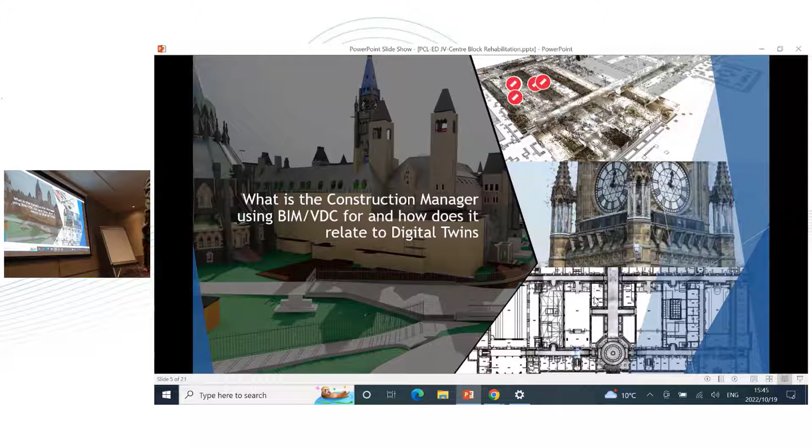So we've been at the project for about... Pat, how long? 2018. So the project initially started in 2018. We got the keys to the building in October of 2019. It was a super big deal. And really we started our demo and abatement series of projects probably in January of 2020.

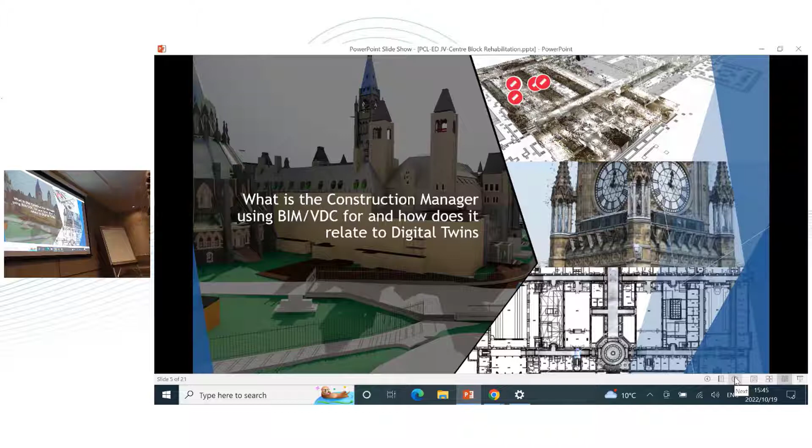So it's progressing. There's a lot to do. I often do take visitors, I bring them on site for the first time and they look at me and they're like, 'What? How come this is going to take so long?' I say, 'Well, let's take a walk.' And we do a quick walk. Well, you can't quickly walk through the building, but you take a walk through and you understand the scope that's involved in it. So.

Sorry if there were any troubles getting started. No worries, you can just use the mouse to switch between the slides. Absolutely. Can I go back though?

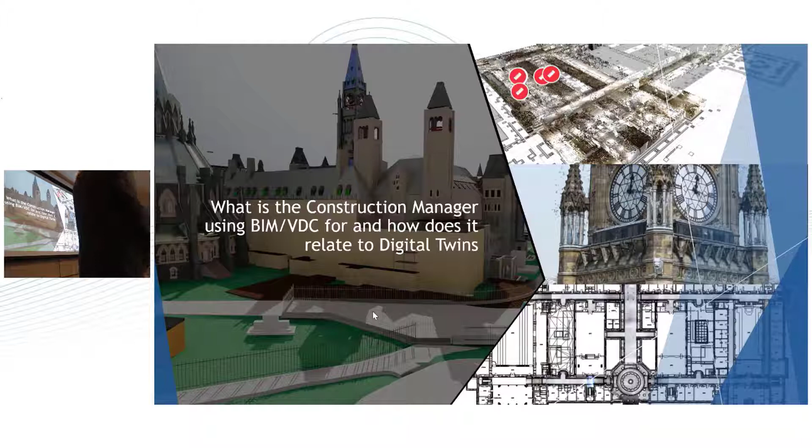We use it for analysis as well. So oftentimes we have some super smart project managers and superintendents on the job, and they'll come up with an idea and we build it virtually so that we can take a look at it, find any problems, and solve them before we actually execute in the field.

So one of the key components to the whole project is heritage, and tracking that heritage, documenting that heritage, all that's critical to what we're doing there. So on this side here, you see this is a drone capture of the Peace Tower. Very nicely done. We have a drone that flies bi-weekly and on request. So if something special comes up, the drone goes up and takes a flight and snaps some photos.

And this is a mesh that we've created from that drone imagery. So we oftentimes combine the two, the mesh and the point cloud data, so that we can analyze and do test fits around stuff.

So as I said, heritage documentation and site protection. Heritage is key. Heritage is probably the most important factor on this job, just because there is so much heritage within the building that needs to be either removed or protected in place while we do construction.

As you can imagine, there's a unicorn statue in the Senate side of things, and it has this little unicorn horn sticking out of it. So we have to deconstruct the Senate while making sure that we don't knock the horn off the unicorn. So it's doing things like documenting that and protecting it in place.

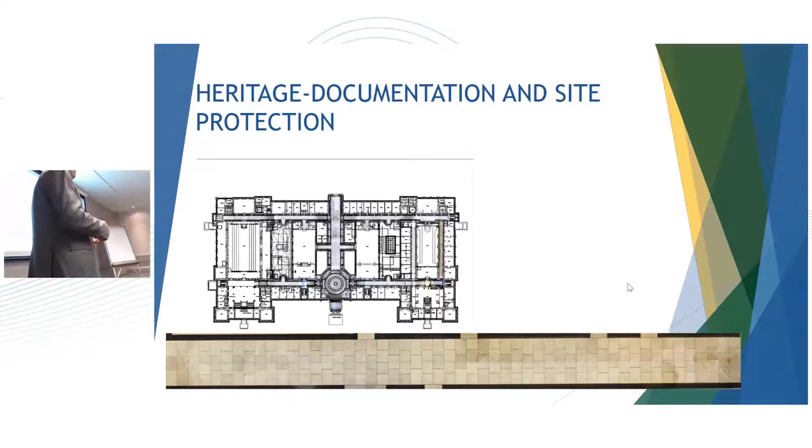So I can oftentimes say, can you send me the raw data for this floor so I can send it to the conservators so that they have a more holistic view of that floor? It's also all geo-referenced, so when it comes to putting it back in place, we can pin those points and get the exact location. Each of these marble floor tiles also gets a unique asset identifier as well as a barcode, then it goes in the box and gets shipped out. We have a management system that tracks each piece of heritage that goes out of the building, so we know exactly where it is at any given point in time.

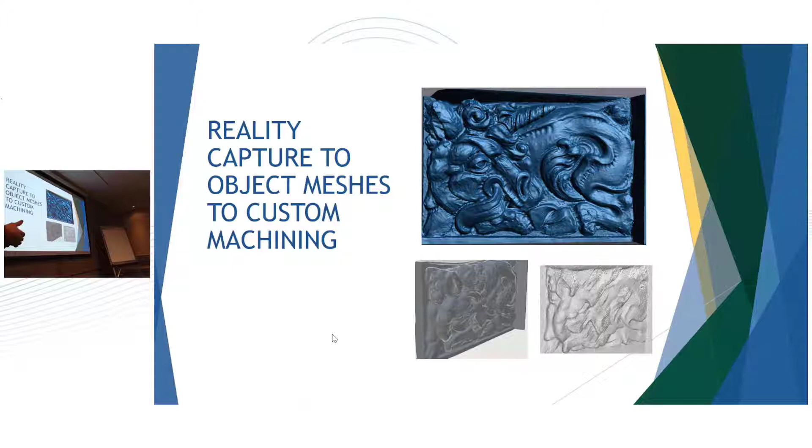And then what we'll do is we'll invert the geometries so that we can create custom protection around these specific pieces. So there's a long list of items within center block that we need to look at that are hand scanned. That process is just kind of continually ongoing.

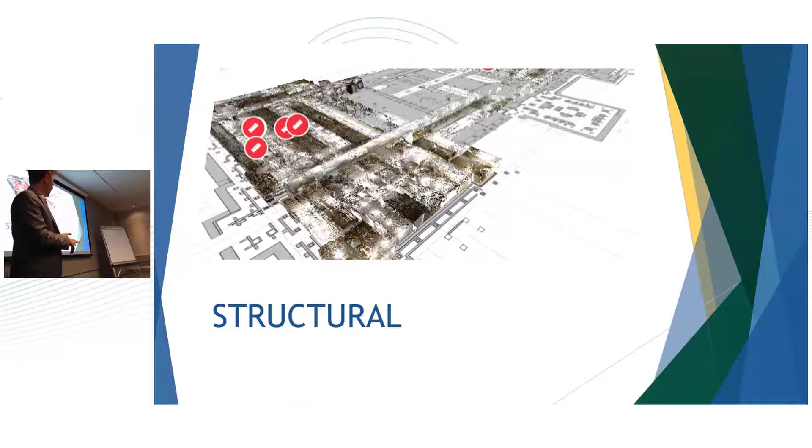So now I'll talk about structural. I didn't put an agenda at the front of this, which is a mistake. But anyway, so I'll talk about heritage, structural, envelope, MEP, our excavation and new construction, and we'll end it off with a little bit on site logistics.

So as far as structural goes, there's going to be some pretty massive structural upgrades that happen to center block, especially in the foundation area. So we'll be adding base isolators, and this is for seismic protection. They're basically big rubber pucks that vibrate during a seismic event.

So eventually what we need to do, after we strengthen all of the existing foundation with new concrete beams, what we'll eventually have to do is pile down these suckers, which will go down the 2 levels that we're excavating underneath center block. And then we'll have to install the shoring.

So just for a little bit of visual reference, this piece of steel, my superintendent walked in the other day and he said, 'We need to look at access for the basements.' I was like, 'We're always looking at access for the basements. What are you talking about?' He said, 'Well, this is a 65-foot long piece of steel. How are we going to get that in there exactly?'

So once that shoring goes in, there's a set of jacks that go in on top of the shoring. Those jacks are going to lift the building up. We're going to cut some concrete out and we're just going to slide those base isolators in. It's going to be smooth as silk. So you can imagine trying to coordinate these temporary works around our already existing temporary works. Takes up a fair amount of our time.

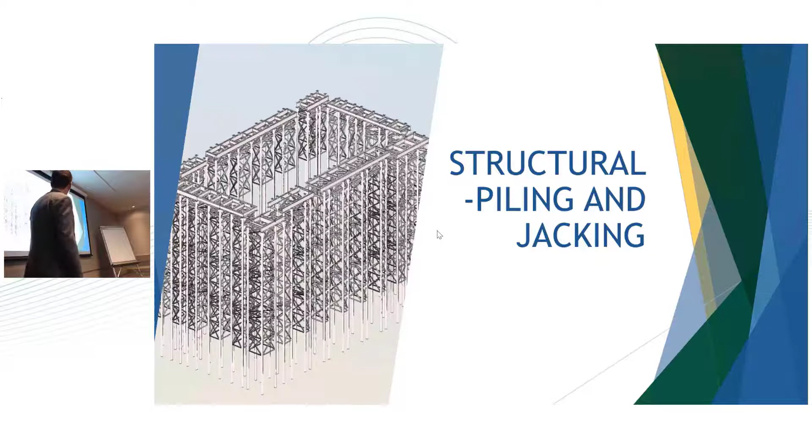Yeah, exactly. So this is just a shot of, this is our piling. This is our actual new construction coming up from 2 levels below. So in order not to kind of coop ourselves later on, we have to coordinate that now a couple of years in advance so that we know exactly what's happening where.

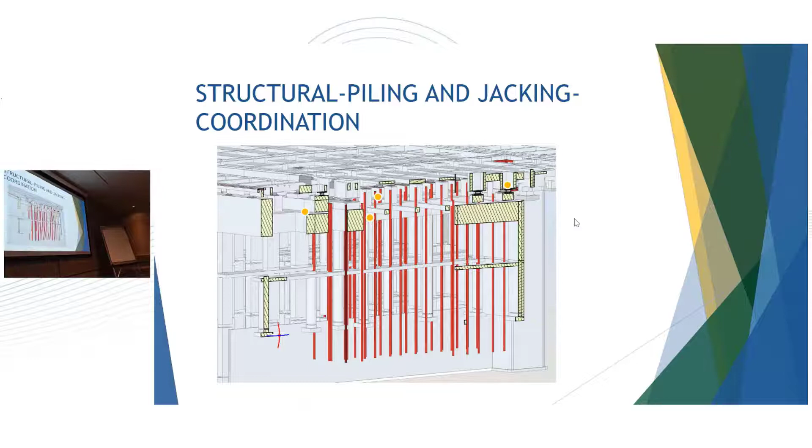That's a base isolator there, and then there's base isolators there. So I think there are about 850 base isolators that are going to be installed eventually. It'll be through the main concrete piers as well as the exterior wall. So coordinating all that is a full-time job for sure.

So the envelope at center block is masonry, it's all masonry wall. And in order to do the work that needs to be done on the masonry, we build scaffold and scaffold and scaffold. So right now we've completed the north wall scaffold. We'll be continuing on the east and west scaffold.

There will be scaffold towers that go into the center courtyards. And then we'll finish up with the south face and the Peace Tower at the end of the day. So eventually the whole thing will be surrounded by scaffolding. Again, it's temporary works that we need to know where it's at and coordinate around that. Yeah, so that's the north wall complete now.

And yeah, we'll be continuing around the east and the west.

The process we've come up with for the scaffold is: as a CM, we come up with a general idea of how we want the scaffold to land, where we want the stair towers to go, where we want the loading bays to go. We send that out to the public for tender, and we get a response from somebody who knows scaffold backwards and forwards. They come up with a plan that suits our needs, go out and build it, then send us the as-built files, and we recreate that digitally.

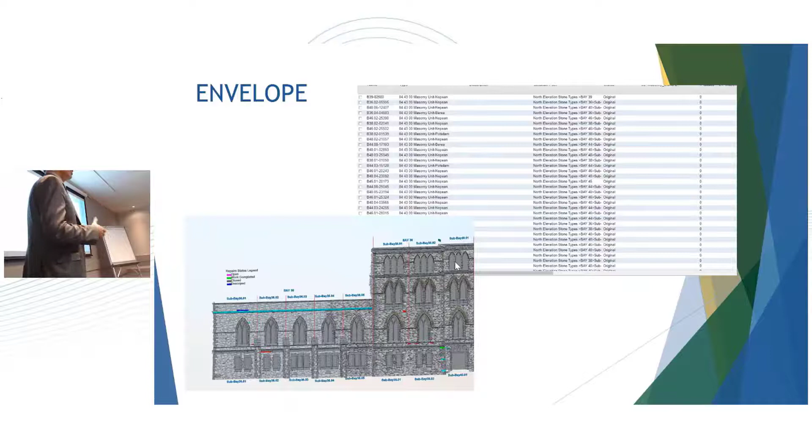Our trade partner at Moran is really good on the north wall, so we'll see how the rest of it goes.

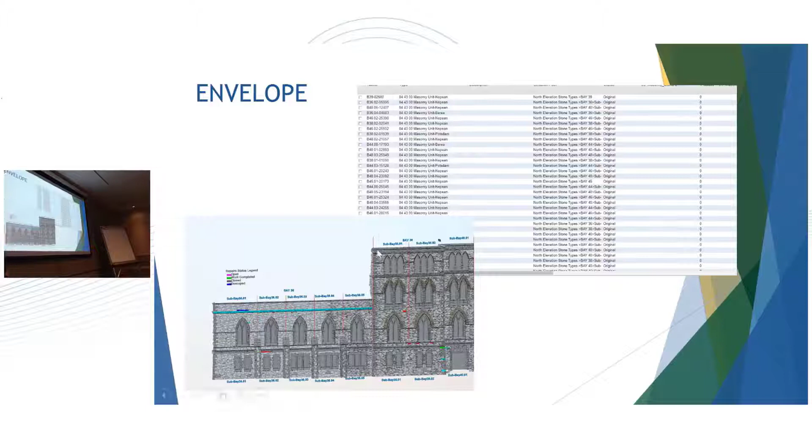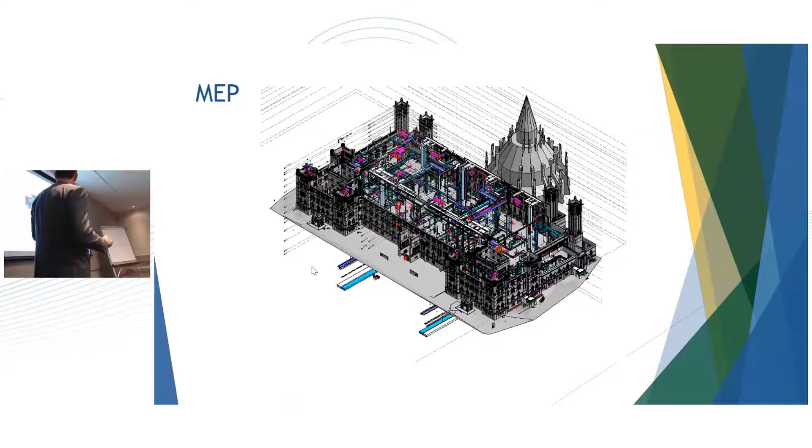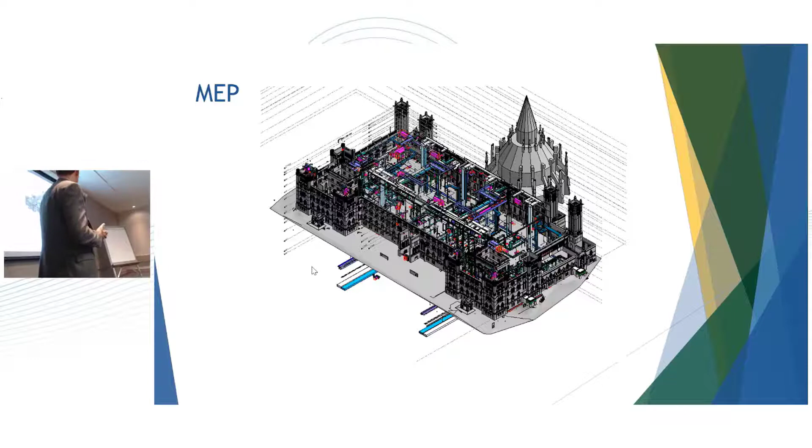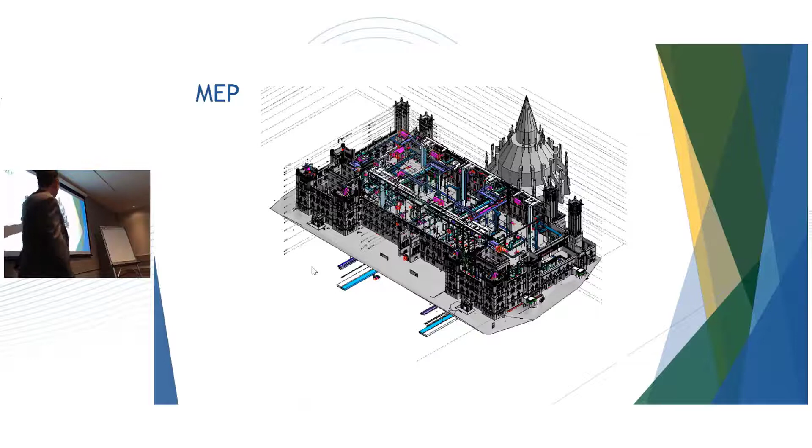For mechanical, electrical, and plumbing, the entire system needs to be gutted and redesigned, so we're working with Centrus. Our trade partners are under a design assist component of their contract, so designers, engineers, and trade partners are all working in the same model towards a solution. Because we can't create any new spaces within Center Block, we have to shoehorn everything into existing spaces around the heritage elements and around the infrastructure being put in place. That's a generally large undertaking.

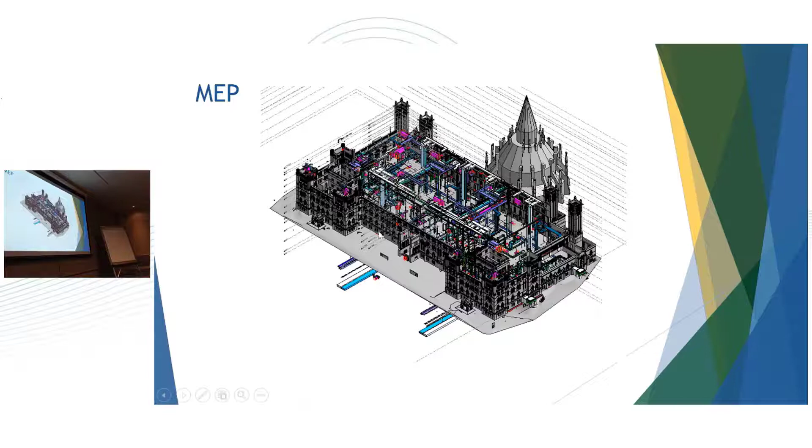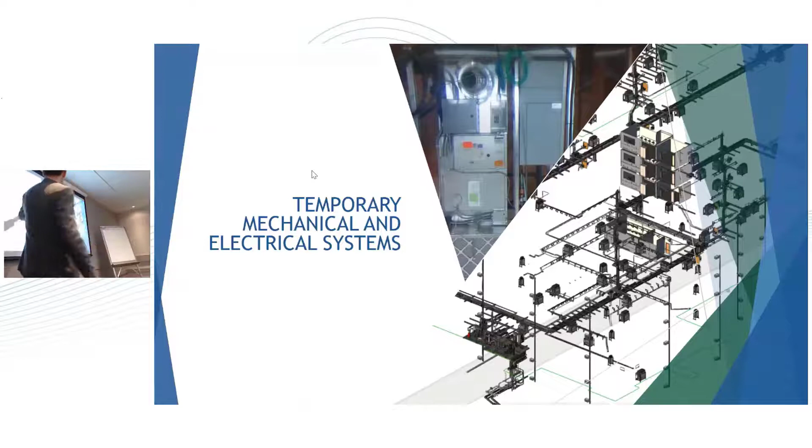Before we even started all that, we had to install a temporary mechanical and electrical system, which maintains the site humidity, heating, and various other sensors so we can control the atmosphere within the building. These heritage assets are very sensitive to fluctuations, so we need to maintain appropriate levels within the whole building while it's under construction. The first major component of the rehabilitation was installing the temporary system, which will be there for close to the duration of the program, and then we pull out all of the existing infrastructure.

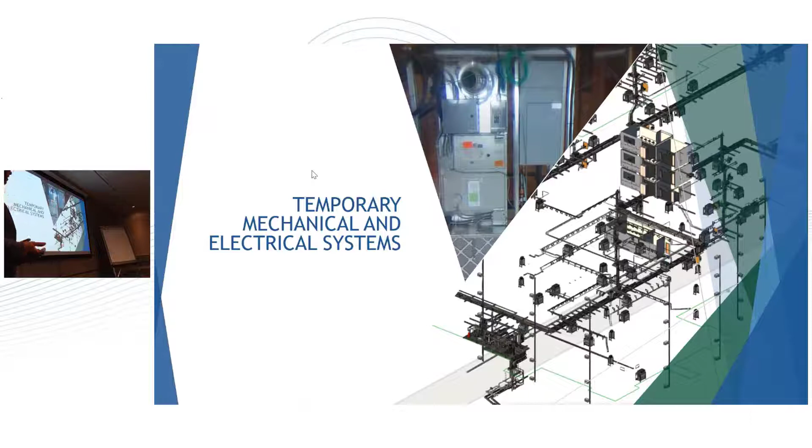Trade partners on this part were Modern Niagara and TWZ, and they're using their BIM capabilities to coordinate, do their calculations, all that sort of thing. It worked out very well, and it's still running.

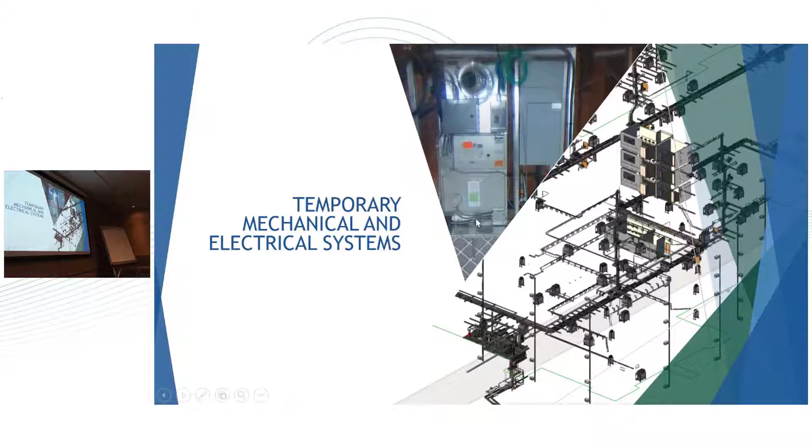The next component is the excavation for the Parliamentary Welcome Center, in front of Center Block for the new construction. The Parliamentary Welcome Center is going to provide a public access point as well as new service and program areas for Center Block, taking a little bit of load off Center Block as far as space goes. There will be more conference spaces, I think, in the Parliamentary Welcome Center.

Right now we're in year 2 of a 3-year excavation program. We're going down about 3 levels. If the office is 400 feet long, the excavation is 500 feet long.

A lot of the time what we do is use drones for imagery, and then bring in the terrestrial scanner for our as-built conditions. We're digitizing the entire excavation so we can see things like these rock bolts, so anybody coming down the road in the future can look at that digital data and see there are rock bolts there. We also use that for our models, because we have to coordinate throughout the entire site, so as we get this data, we feed it into our program and model it out.

That way we're getting information like exactly what type of anchor it is—is it a 15B, a 15A, is it 30 meters long or 15 meters long. At the end of the job, we'll hand that over to our client and consultants and say, here is the as-built data as required, and anytime you go to cut rock in that area, watch out for these rock bolts.

And yeah, I guess to wrap it up, just quickly, anyway.

So site logistics are key to what we do. The drone flies twice a week, and then we use Civil 3D so that we can track all the underground in the area as well.

We use it for our egress, emergency egress. So there's a fair amount of planning that has to go around our fire access routes because fire is a bit of a consideration at Center Block. So we use all that data, as much data as we can pull.

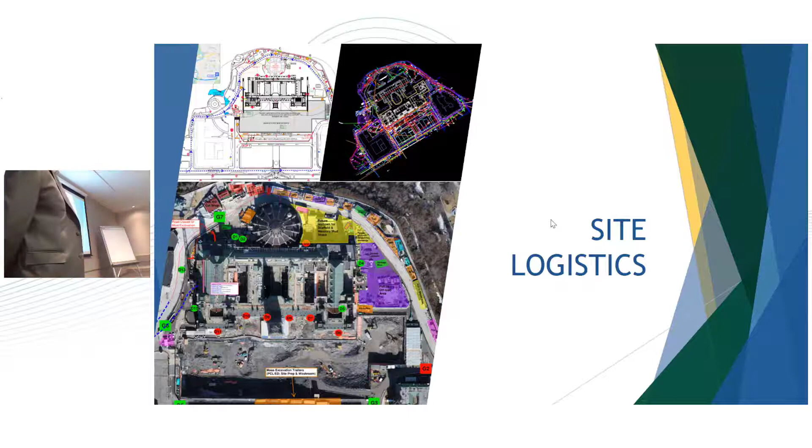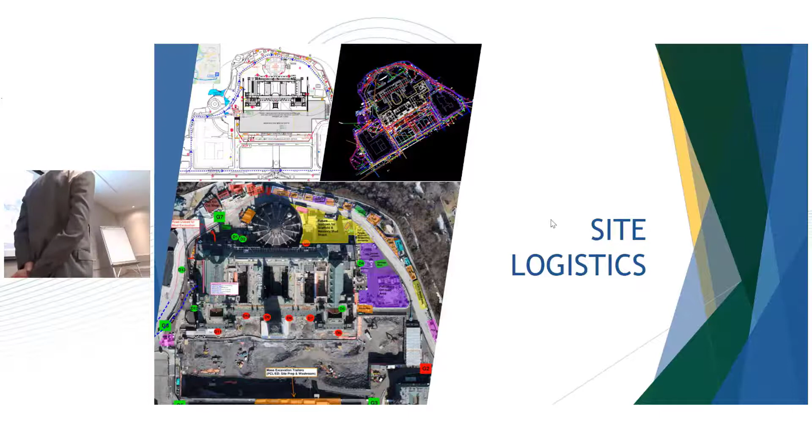We also use it for volumetrics in the excavation, and tracking the site logistics is so important to what we're doing there. We have to coordinate with PSPC operations as well for any of that work.

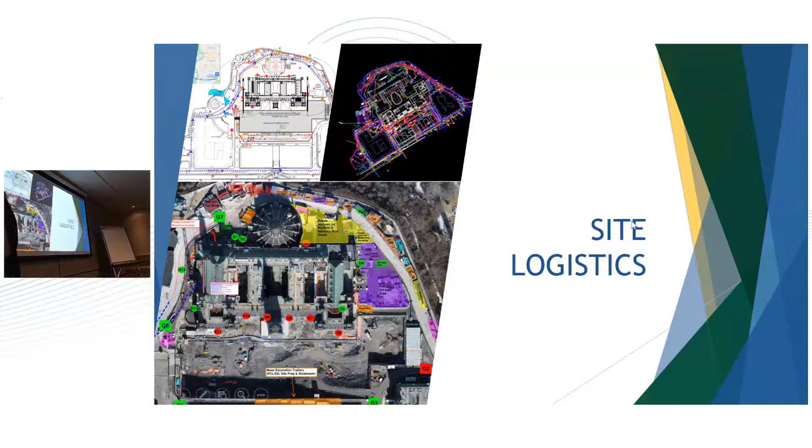So that brings us to the end. I feel like I breezed through that, but it was just really meant to be a high level view. We could sit and talk for hours about the various projects that go on there.

One thing to talk about is the program and the projects. The Center Block itself is the program, and within that program we have about 12 project teams running simultaneously. So there's a lot of coordination between their teams - our demo 456 team, our demo level 01 team, and our demo level 2, level 3 team - coordinating access routes, that sort of thing.

So yeah. Questions? So many questions. I have so many too.

The collaboration process - so when I talk about the 12 smaller projects, that's really an internal collaboration. That's part of the PCL ED joint venture construction management team. So we've just divided the work into smaller projects rather than take a big bite and say everyone go, we've divided everybody up into project teams.